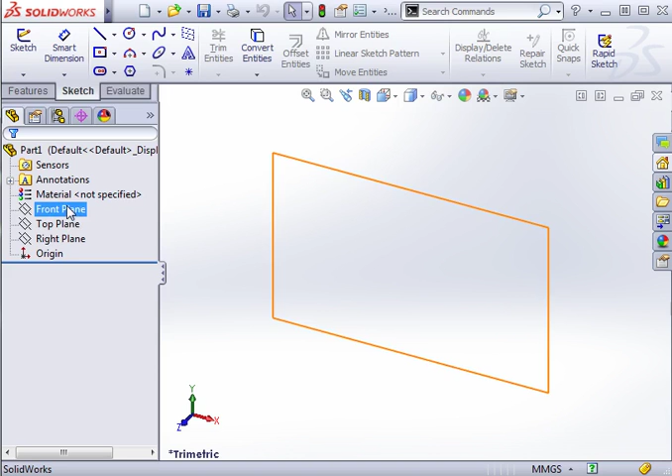For this example, I'll be sketching a wide rectangle on the top plane and extruding it up to give it some thickness. I don't necessarily have to sketch this rectangle on the top plane, however. I could sketch it on the front, top, or right reference planes. But you have to decide if you want the final part to look like this, or like this. If we want the part to look like this, we'll begin this rectangular sketch on the top plane.

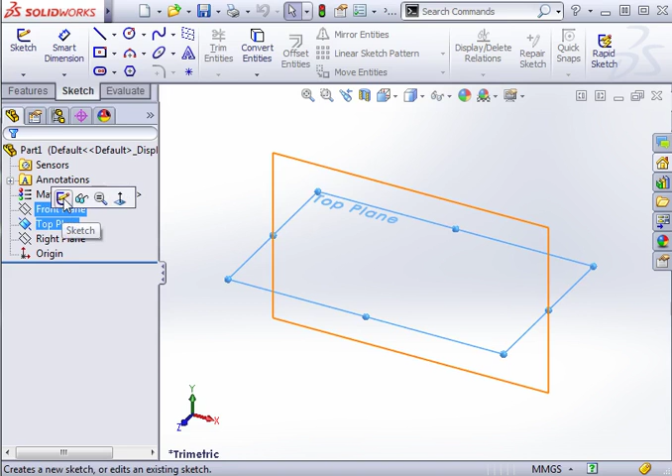To begin the sketch, I'll click on the top plane and select the Sketch icon from the pop-up menu. When I do, the graphics area rotates onto a normal to perspective, so I'm looking directly onto the top plane and we can begin sketching. I'll first launch the rectangle tool from the shortcut toolbar by pressing the S key on the keyboard.

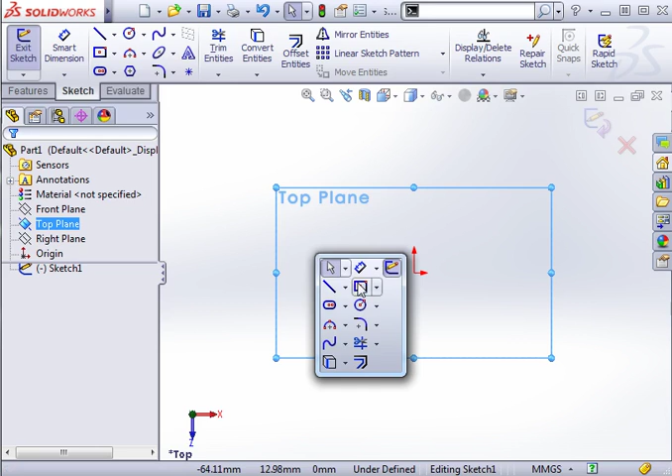For this design, I'd like the reference planes to pass directly through the center of the part, so I'll be using the Center Rectangle tool. I'll show you a little bit later how keeping the reference planes in the center of the part will help with some aspects of symmetry, and later assembling other components once we begin talking about assemblies.

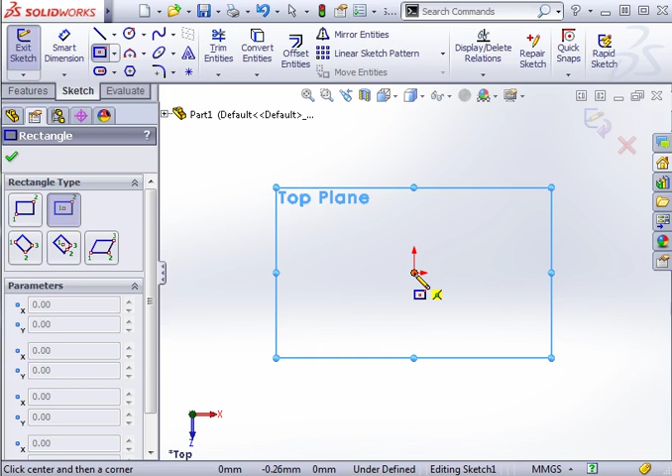When I begin the center rectangle, I'll make sure that the yellow flag appears next to my pointer, indicating that a geometric relation will be added on the origin for the center point of the rectangle. I'll click to begin, click again to give the rectangle a size, and press Escape on my keyboard to deactivate the rectangle tool. At this point, since the size of the rectangle is underdefined, we'll add a couple of dimensions.

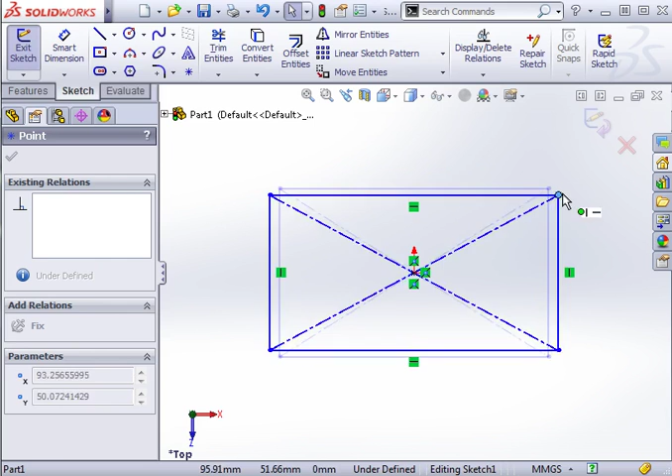I'll activate the Smart Dimension tool from the shortcut toolbar by again pressing the S key on the keyboard. I'll start with the length dimension by clicking on it, click again to position the dimension on the graphics area, and type in 150 millimeters. I'll click the green check and the dimension is added.

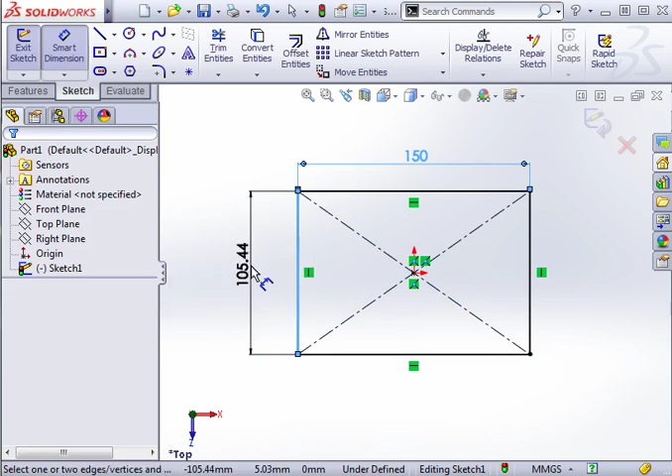For the width dimension, I'll click on this line here. Click again to position the dimension, type in 100 millimeters, and click the green check. At this point, the status bar tells us that the sketch is fully defined and all the geometry turns black to indicate this as well.

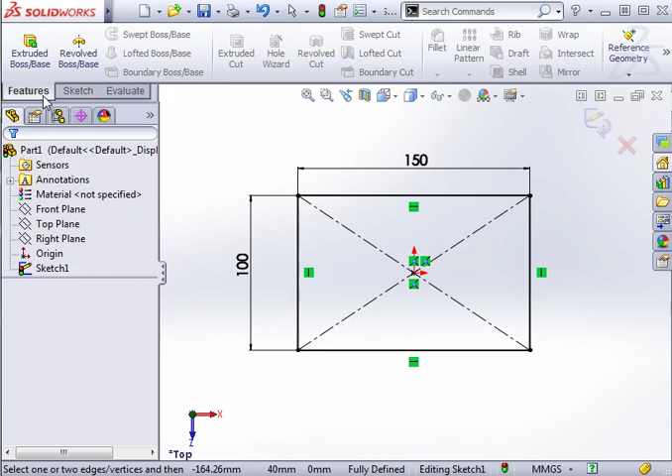Next, I'll launch the Boss Extrude tool by switching over to the Features tab in the Command Manager and select the Extruded Boss Base tool. Here, I'll be using a blind extrude so that the thickness of the rectangle will be going above the top plane. I'll type in 15 millimeters for the depth and press Enter once on the keyboard to update the preview. The preview looks the way I want it to, so I'll click the green check to finish the feature.